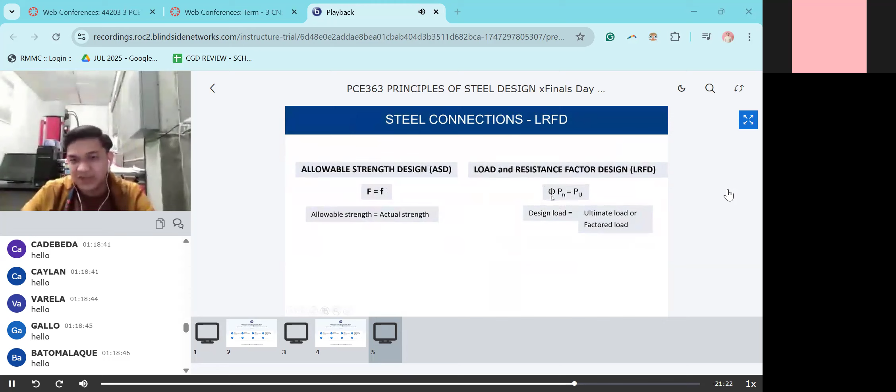Yan. So, proceed tayo. First, we have two topics for this one, LRFD. Bolted steel connections, then we have welded steel connections. So, start po tayo kay bolted steel connections. So, we have two angles, A36, which is 100 by 100 by 9.5 millimeters. Yung thickness ng ating angle bar is in tension. So, naka-pull, no? Naka-tension yung force P natin. It's connected to a gusset plate nasa gitna. As you can see in our cross-section with 22 mm diameter bolts in 25 mm diameter holes. As shown in the figure. Again, ito yung gusset plate, ito yung ating angle bar.

So the service dead load is 135 kilonewton. Use 1.2 dead load plus 1.6 live load. So parang sa RC, di ba? Meron tayong parang factor of safety, 1.2, 1.6. So, number one, determine the value of service live load P based on tensile yielding in the gross area of the angle. This phi is equivalent to 0.9. Number two, determine the value of service live load P based on tensile fracture of the net area of the angle, 0.75. So, assume the effective net area is 85% of the net area.

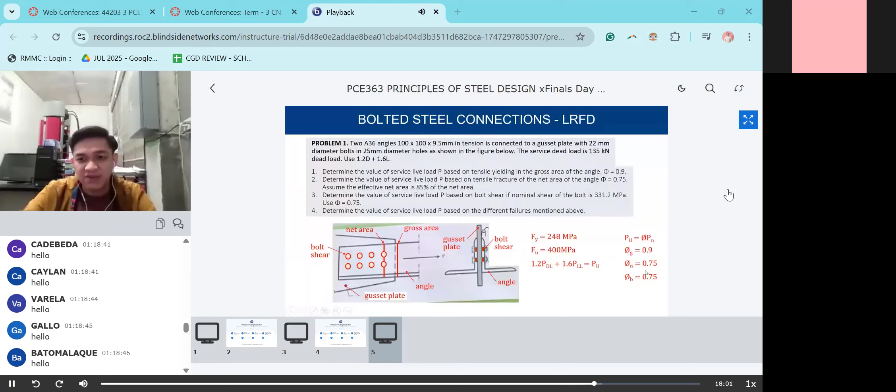Fy is 248 if it is not given. Fu is also not given, so that is 400 MPa. Tapos meron tayong load factor, no? 1.2 dead load, 1.6 live load. Diba? Alam din natin to na load factor sa ating RC. Okay, start tayo. So, PU equals phi PN based sa ating binigay sa ating problem. Gross is 0.9, net is 0.75, bolt shear is 0.75. Start. Same pa din yung process, pero yung last part lang yung magkaiba.

So, first thing is gross area. Kailangan natin yung gross area. So, hindi binigay yung area. Yung binigay is yung measurements, 100 by 100 by 9.5, di ba? So, same. Saan yun? As you can see sa figure, parang nakatilt siya, pero assume natin siya na naka-box type. Diba? So, this is 100. Ito yung 100. Ito yung 100. Then, ang thickness nila is 9.5. Yan.

Tsaka ito, 9.5. So, therefore, 100 times 9.5, ito na part. Shade natin. Then, dito na part, tanggalan natin ng 9.5 si 100. Ito yung 100, di ba? So, ito yung 9.5. So, ito yung natira. 100 minus 9.5 times 9.5. Times 2 kasi dalawa. So, paki-calculator class, what is our area gross?

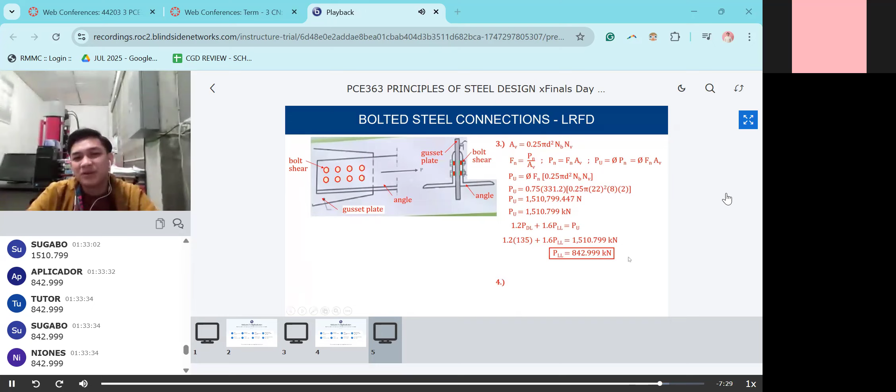What is our service live load for this section? So that is 842.999. Tinipid pa no, hindi pa ginawang 843. Final answer. Ayan. So, based on our failures, saan yung pinaka safe natin na service live load? Syempre yung pinakamaliit.

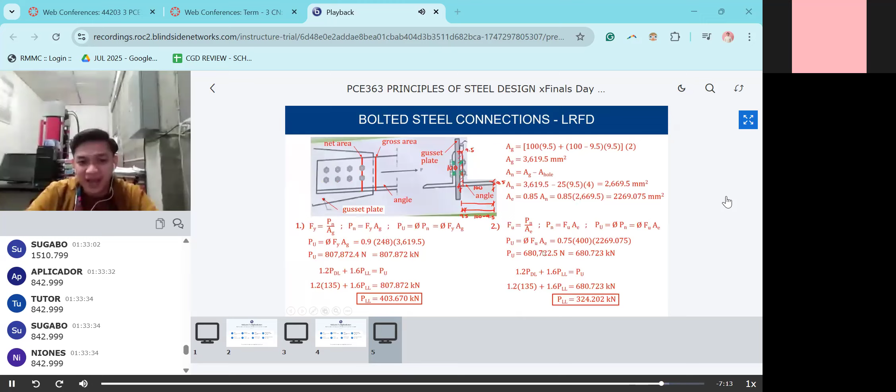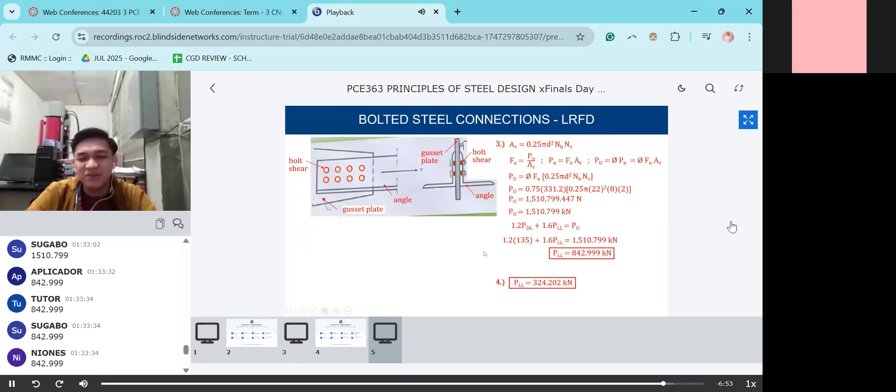Based on our, saan yung 324 galing? Kay net area. Ayan. So, that is 324.202. Okay? So, ganyan lang po kapag bolted steel connections in LRFD. So, proceed tayo sa ating last problem for this subject. LRFD po tayo pero naka-welded. Yan nga. So, same lang sa ginawa natin last time pero naka-phi lang yung ating style. So, let's proceed. Problem number 2.

We have 2 A36 plates. Yan, silang dalawa. With thickness of 10 mm. And FU is 400 MPa. Are connected to each other using fillet welds. The size of weld is 8 mm using E60 electrodes. Binigay, FU is 414. Again, itong 400 is pang plate na FU. Yung 414 is pang weld na FU.

Number 1, determine the value of ultimate load P. Yung PU yung hinahanap, no? Wala na ditong dead load tsaka live load. Diretso na siya. Mas maganda. Mas madali. Based on tensile yielding in gross area. Phi is 0.9. Number 2, determine the value of ultimate load P based on tensile fracture in the net area. So, 0.75 kapag net area. Then, determine the value of X.

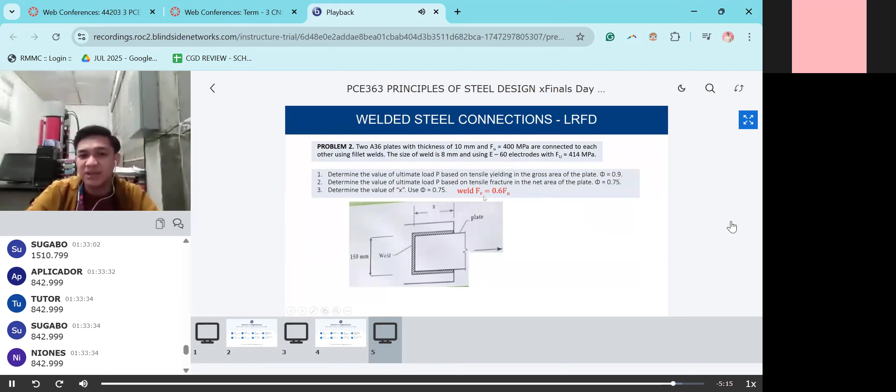Ayan siya. So, weld. Use phi is equivalent to 0.75. So, yung shaded part, yan yung weld natin. Binigay lang is 150. X is unknown. So, start po tayo. No? Kapag hindi binigay, you need to memorize. Pero I hope na ibibigay sa inyo. Pag welding is 0.6 FU.

Okay, start tayo. So, sa number 1, again, based on gross area. Gross is just thickness times length. 150 times T, no? Yan, gross area. Anong gagawin? PN over AG. Transfer sa kabila. PN equals FY AG. PU yung hinahanap. Ano yung PU? Phi times PN. So, therefore, PU is Phi FY AG.

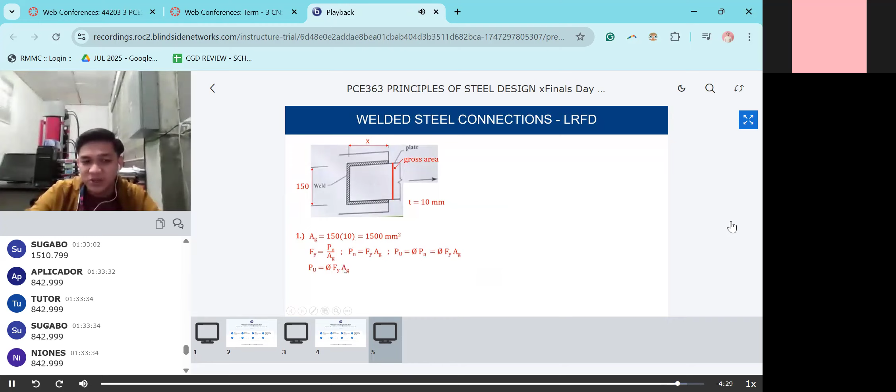Substitute lang natin, class. AG natin is 150 times 10. So, 1,500. Pwede din diretso na dito, no? Para dire-diretso. So, 0.9 times 248 times 1,500. What is our P? Yan, ganyan lang kadali. Yung kaibahan lang, imbes na ASD, naka-LRFD siya. That is 334.8 kilonewton. Final answer.

Number 2, yung hinahanap is net area. Then, as you can see, no, hindi siya naka-angle. Wala po siyang liko-liko. So, therefore, common sense will tell you, same lang sila ng area. Nagkatalo lang sa ating PN. Diba? Pag gross area, FY po yung gagamitin. Pag net area is FU yung gagamitin. Yun lang. So, imbis na 248, yung gagamitin natin is 400.

Then, pag net area, magkaiba po yung ating phi. Imbis na 0.9, that is 0.75. So, what is our PU based on net area? Yes, correct. That is 450 kilonewton. Final answer. Next and last situation or yung hinahanap sa problem na to.